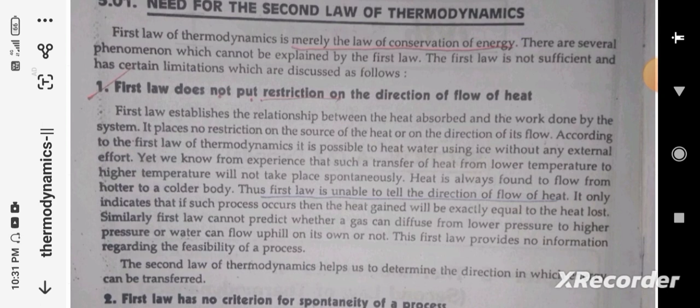Similarly, the first law cannot predict whether a gas can diffuse from lower pressure to higher pressure, or whether water can flow uphill on its own or not. The first law provides no information regarding the feasibility of a process.

The second law of thermodynamics helps us determine the direction in which energy can be transferred. The first law has no criterion for the spontaneity of a process.

There are several natural processes which take place of their own in one direction only, but do not proceed in the reverse direction on their own. For example, water flows down a hill but cannot flow up the hill on its own. Flow of heat from warmer to colder body, expansion of gas into a vacuum, burning of fuels, etc. are some examples of processes which take place only in a particular direction. Such processes are called spontaneous processes.

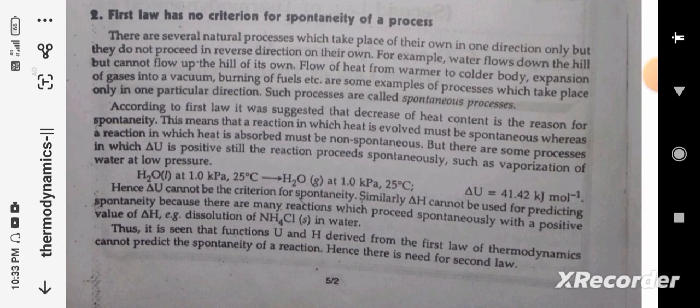Similarly, del H cannot be used for predicting spontaneity, because there are many reactions which proceed spontaneously with a positive value of del H. For example, dissolution of ammonium chloride in water. Thus, it is seen that the functions U and H derived from the first law of thermodynamics cannot predict the spontaneity of reactions. Hence, there is a need for the second law.

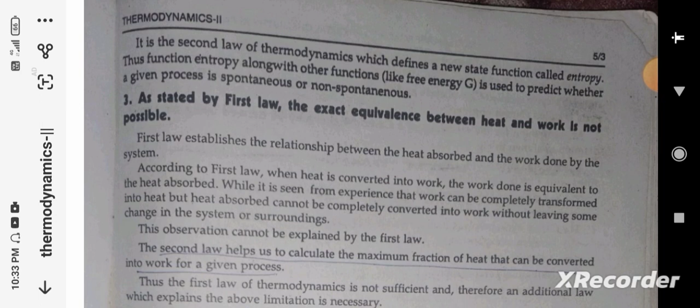It is the second law of thermodynamics which defines a new state function called entropy. This entropy function, along with other functions like free energy G, is used to predict whether a given process is spontaneous or non-spontaneous. As stated by the first law, the exact equivalence between heat and work is not possible.

The first law establishes the relationship between the heat absorbed and the work done by the system. According to the first law, when heat is converted into work, the work done is equivalent to the heat absorbed. While it is seen from experience that work can be completely transformed into heat, heat absorbed cannot be completely converted into work without leaving some change in the system or surroundings. These observations cannot be explained by the first law.

The second law helps us calculate the maximum fraction of heat that can be converted into work for a given process. Thus, the first law of thermodynamics is not sufficient, and therefore an additional law which explains the above limitation is necessary.

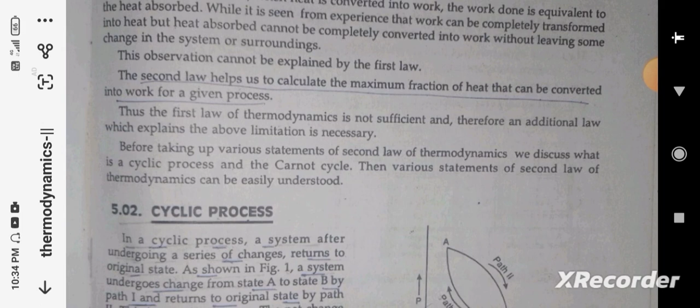Before taking up the various statements of the second law of thermodynamics, we discuss what is a cyclic process and the Carnot cycle, so that the various statements of the second law can be easily understood.

Cyclic process: in a cyclic process, a system, after undergoing a series of changes, returns to the original state, as shown in figure 1. A system undergoes change from state A to state B by path 1, and returns to the original state by path 2. This is a cyclic process.

The net change of internal energy in a cyclic process is zero, that is, del U is equal to 0. Therefore, according to the first law, del U is equal to Q plus W. For a cyclic process, since del U is 0, 0 is equal to Q plus W.

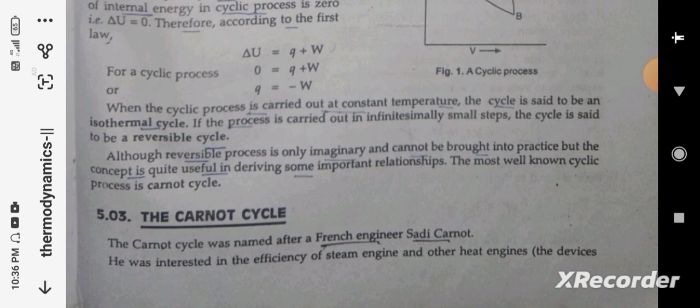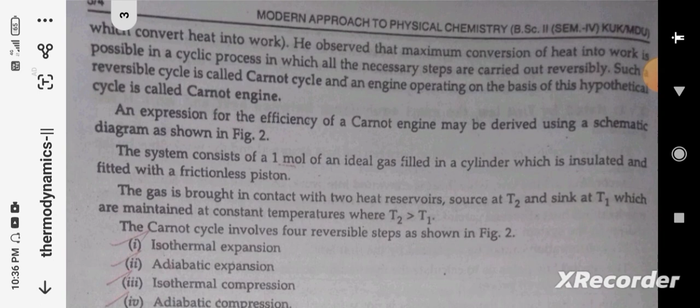The most well-known cyclic process is the Carnot cycle, named after French engineer Sadi Carnot. He was interested in the efficiency of steam engines and other heat engines, devices which convert heat into work. He observed that the maximum conversion of heat into work is possible in a cyclic process in which all the necessary steps are carried out reversibly. Such a reversible cycle is the Carnot cycle, and an engine operating on the basis of this hypothetical cycle is called a Carnot engine. An expression for the efficiency of a Carnot engine may be derived using a schematic diagram.

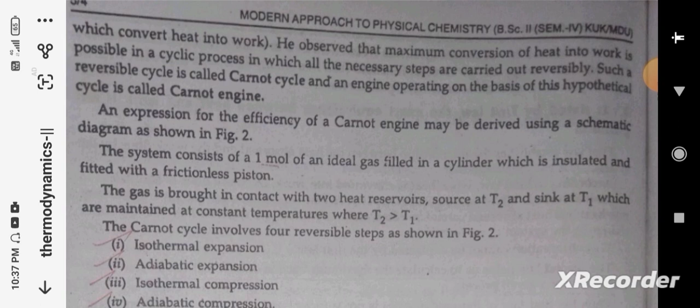The system consists of 1 mole of an ideal gas filled in a cylinder which is insulated and fitted with a frictionless piston. The gas is brought in contact with two heat reservoirs: a source at temperature T2 and a sink at T1, maintained at constant temperatures, where T2 is larger than T1. The Carnot cycle involves 4 reversible steps: isothermal expansion, adiabatic expansion, isothermal compression, and adiabatic compression.

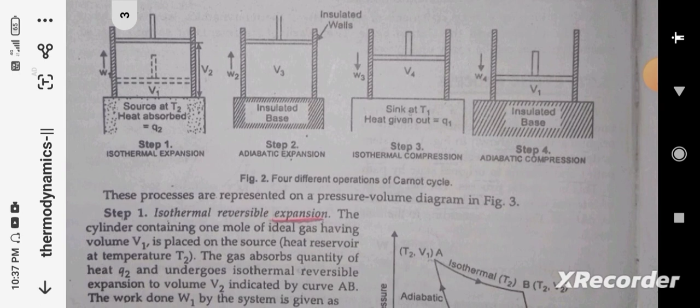The process is represented on the pressure-volume diagram. Step 1: isothermal reversible expansion. The cylinder containing 1 mole of ideal gas having volume V1 is placed on the source.

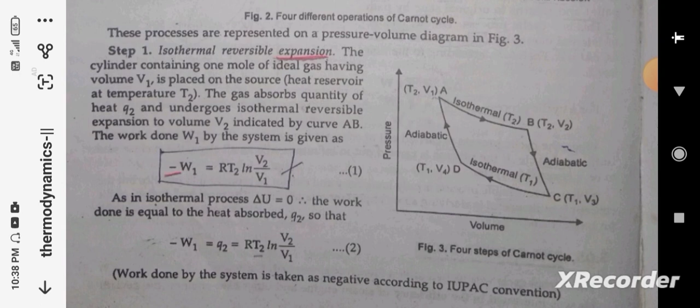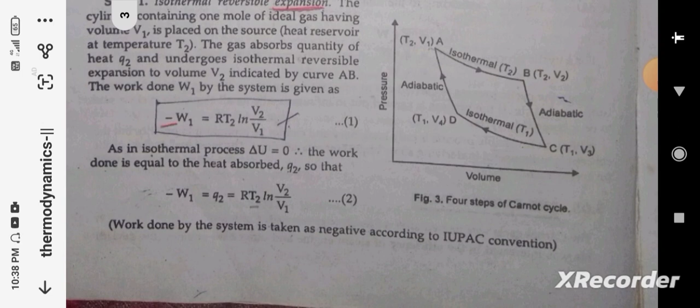The gas absorbs a quantity of heat Q2 and undergoes isothermal reversible expansion to volume V2, indicated by the curve AB. The work done W1 by the system is given by negative W1 equals RT2 ln(V2/V1). Since in an isothermal process del U equals 0, the work done is equal to the heat absorbed Q2, so that negative W1 equals Q2 equals RT2 ln(V2/V1). Work done by the system is taken as negative according to the IUPAC convention.

Step 2: adiabatic expansion. The cylinder is removed from the source and kept on an insulating base. The gas is allowed to expand adiabatically from volume V2 to V3. In this step, the temperature decreases to T1. This path is shown by the curve BC. The heat absorbed by the system is 0, as expansion takes place under adiabatic conditions. The work done W2 is given by the equation involving Cv, the heat capacity of the ideal gas. Work done is negative by the usual convention.

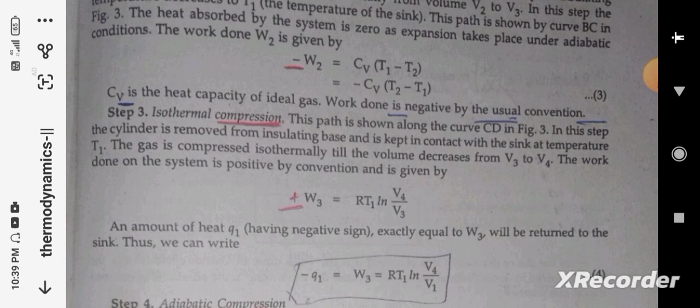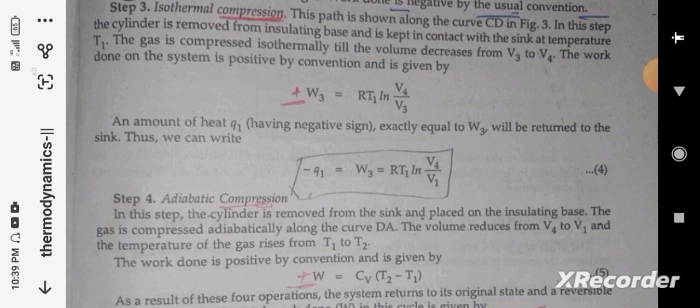Isothermal compression: this path is shown along the curve CD. In this step, the cylinder is removed from the insulating base and is kept in contact with the sink at temperature T1. The gas is compressed isothermally till the volume decreases from V3 to V4. The work done on the system is positive by convention and is given by W3 equals RT1 ln(V4/V3). An amount of heat Q1, exactly equal to W3, will be returned to the sink. Thus we can write the fourth equation.

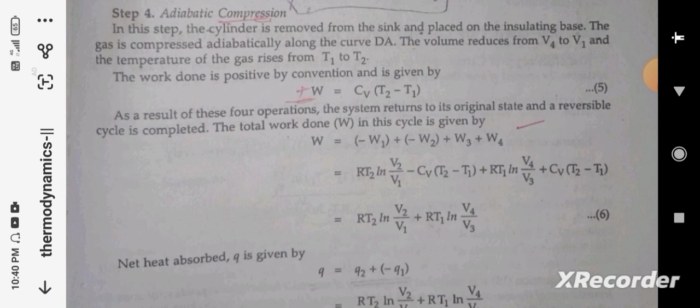Adiabatic compression: in this step, the cylinder is removed from the sink and placed on the insulating base. The gas is compressed adiabatically along the curve DA. The volume reduces from V4 to V1 and the temperature of the gas rises from T1 to T2. The work done is positive by convention and given by equation 5. As a result of these four operations, the system returns to its original state and the reversible cycle is completed. The total work done W in the cycle is given by equation 6, and the net heat absorbed Q is given by this equation.

Since the points T2,V2 and T1,V3 lie on the same adiabatic curve BC, and T2,V1 and T1,V4 lie on the adiabatic curve AD, using the expression TV^(gamma-1) equals constant and comparing equations 7 and 8, we get V4/V3 equals V1/V2.

Substituting these equations, we get the value of W, equation 11. From the above derivations, it is observed that the work done in the Carnot cycle is only the work involved in the isothermal operations, because the work done in the adiabatic operations cancels one another.

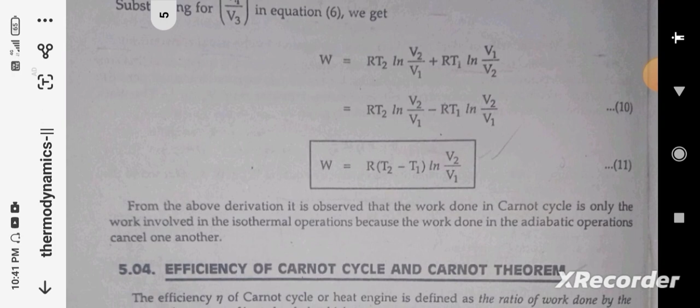Efficiency of the Carnot cycle and the Carnot theorem: the efficiency eta of the Carnot cycle or the heat engine is defined as the ratio of the work done by the system to the amount of heat absorbed at the higher temperature.

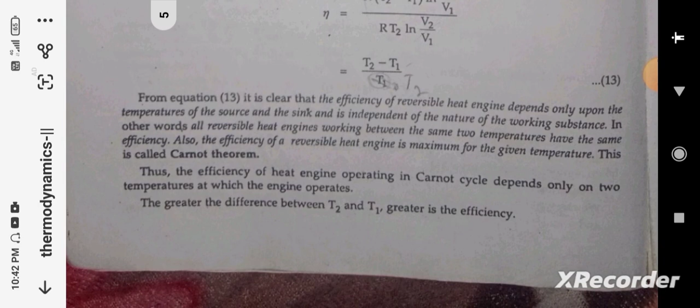Thus, eta is equal to W divided by Q2. Substituting the value of W and Q2 from equations 11 and 12 respectively, eta value is T2 minus T1 divided by T2. This is equation 13.

From equation 13, it is clear that the efficiency of the reversible heat engine depends only upon the temperature of the source and the sink, and is independent of the nature of the working substance. In other words, all reversible heat engines working between the same two temperatures have the same efficiency. Also, the efficiency of a reversible heat engine is maximum for the given temperature. This is called the Carnot theorem.

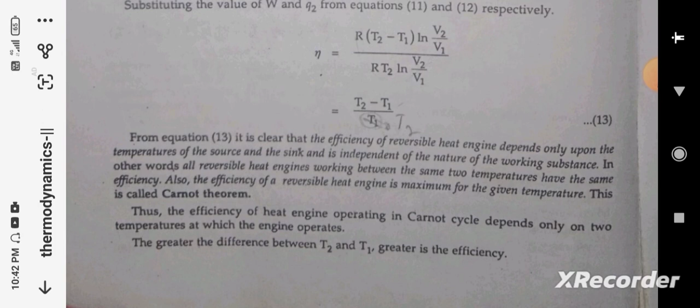Thus, the efficiency of a heat engine operating in the Carnot cycle depends only on the two temperatures at which the engine operates. The greater the difference between T2 and T1, the greater is the efficiency.

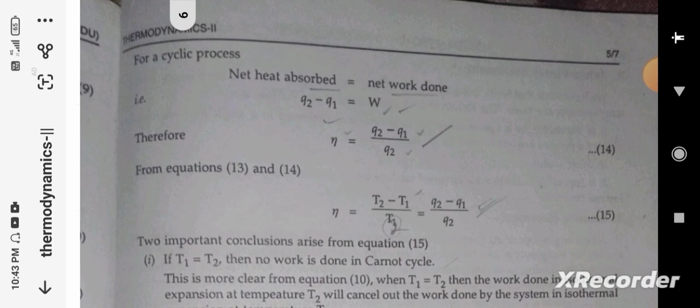For a cyclic process, net heat absorbed is equal to net work done. So Q2 minus Q1 is equal to W. Here eta is equal to Q2 minus Q1 divided by Q2.

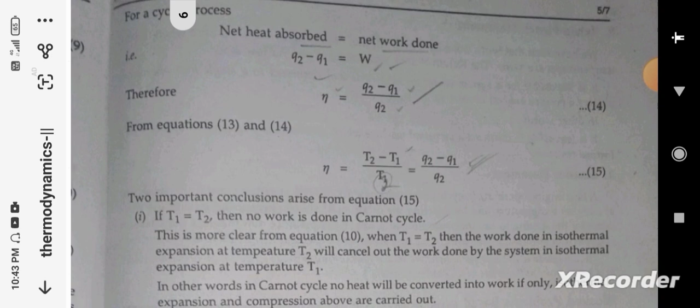Two important conclusions arise from equation 15. If T1 is equal to T2, then no work is done in the Carnot cycle. This is more clear from equation 10. When T1 is equal to T2, the work done is in isothermal expansion.

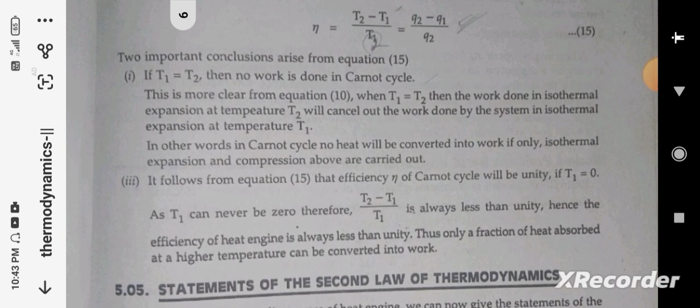At temperature T2 will cancel out the work done by the system in isothermal expansion at temperature T1. In other words, in the Carnot cycle, no heat will be converted into work if only isothermal expansion and compression are carried out. It follows from equation 15 that the efficiency eta of the Carnot cycle will be unity.

If T1 is equal to 0, and as T1 can never be 0, therefore T2 minus T1 divided by T2 is always less than unity. Hence, the efficiency of a heat engine is always less than unity. Thus, only a fraction of the heat absorbed at higher temperature can be converted into work.

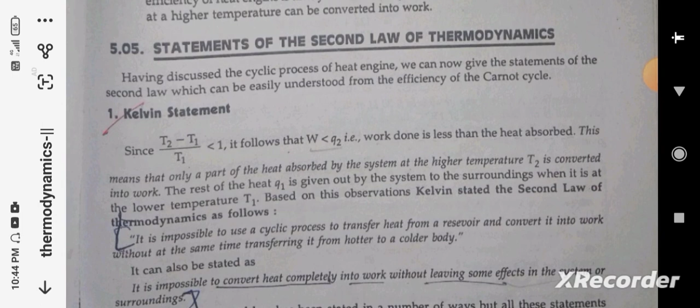Statement of the second law of thermodynamics. Having discussed the cyclic process of the heat engine, we can now give the statement of this second law, which can be easily understood from the efficiency of a Carnot cycle. Kelvin statement: since T2 minus T1 divided by T2 is less than 1, it shows that W

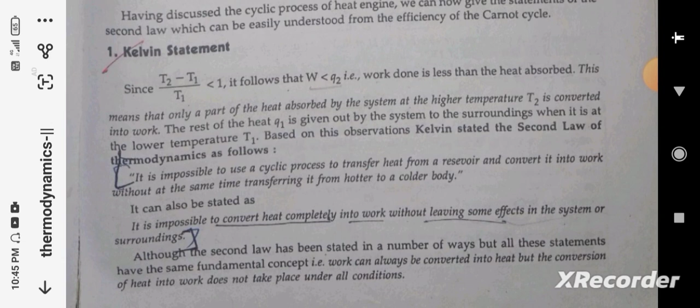is less than Q2, that is, the work done is less than the heat absorbed. This means that only a part of the heat absorbed by the system at the higher temperature T2 is converted into work. The rest of the heat Q1 is given out by the system to the surroundings

when it is at lower temperature T1. Based on these observations, Kelvin stated the second law of thermodynamics as follows: it is impossible to use a cyclic process to transfer heat from a reservoir and convert it into work without at the same time transferring it from hotter to colder body.

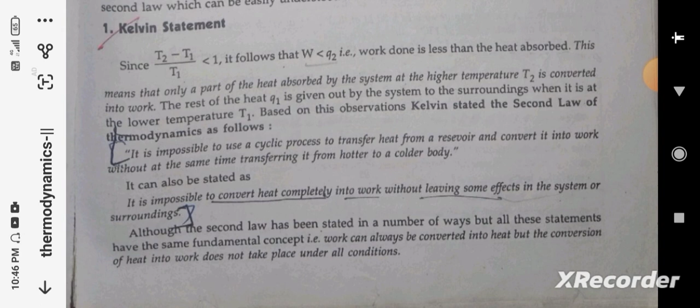It can also be stated as: it is impossible to convert heat completely into work without leaving some effects in the systems or surroundings. Although the second law has been stated in a number of ways, all these statements have the same fundamental concept, that is, work can always be converted into heat, but the conversion of heat into work does not take place under all conditions.

Kelvin and Planck's statement: we have seen that the work done by a heat engine operating in a cycle is zero when the two temperatures are same. The Kelvin-Planck statement of the second law is: it is impossible for a system operating in a cycle and connected to

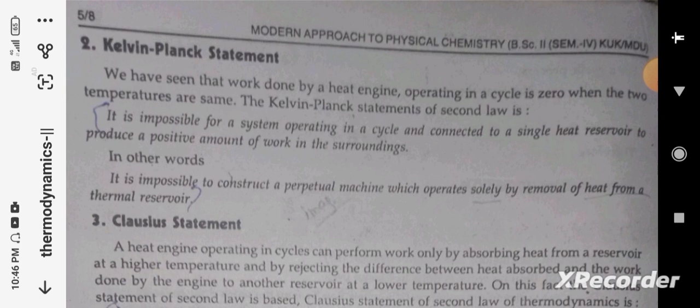a single heat reservoir to produce a positive amount of work in the surroundings. In other words, it is impossible to construct a perpetual machine which operates solely by removal of heat from a thermal reservoir. Clausius statement:

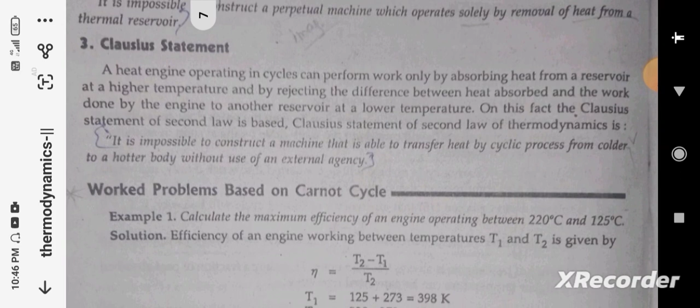A heat engine operating in a cycle can perform work only by absorbing heat from a reservoir at a higher temperature and by rejecting the difference between the heat absorbed and the work done by the engine to another reservoir at a low temperature. On this fact, the Clausius statement of the second law is based.

The Clausius statement of the second law of thermodynamics is: it is impossible to construct a machine that is able to transfer heat by a cyclic process from a colder to a hotter body without the use of any external agency.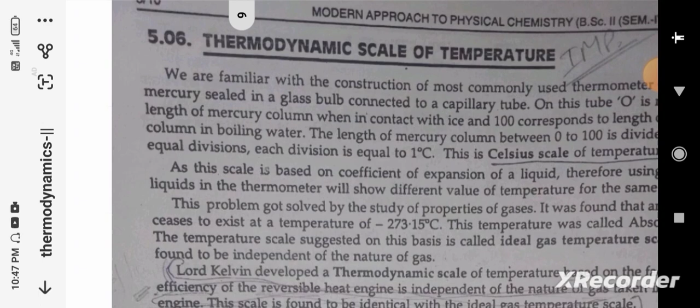Thermodynamic scale of temperature. We are familiar with the construction of the most commonly used thermometer, containing mercury sealed in a glass bulb connected to a capillary tube.

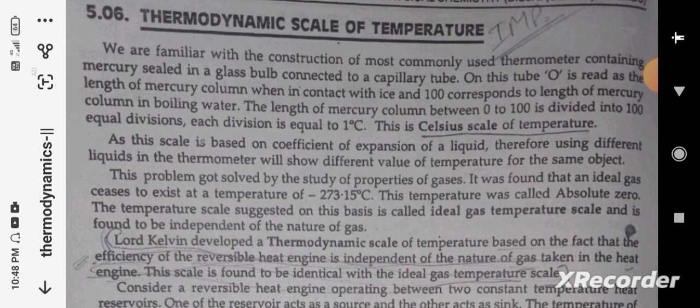On this tube, 0 is read as the length of the mercury column when in contact with ice, and 100 corresponds to the length of the mercury column in boiling water. The length of the mercury column between 0 and 100 is divided into 100 equal divisions, each division being equal to 1 degree Celsius. This is the Celsius scale of temperature.

As this scale is based on the coefficient of expansion of a liquid, using different liquids in the thermometer will show different values of temperature for the same object. This problem is solved by the study of the properties of gases.

It was found that an ideal gas ceases to exist at a temperature of minus 273.15 degrees Celsius. This temperature was called absolute zero temperature. The temperature scale suggested on this basis is called the ideal gas temperature scale, and is found to be independent of the nature of gases.

Lord Kelvin developed a thermodynamic scale of temperature based on the fact that the efficiency of the reversible heat engine is independent of the nature of the gas taken in the heat engine. This scale is found to be identical with the ideal gas temperature scale.

Consider a reversible heat engine operating between two constant temperature heat reservoirs. One of the reservoirs acts as a source and the other acts as a sink. The temperature of each reservoir on the new scale may be taken as proportional to the quantity of heat absorbed, Q2, from the source, or heat lost, Q1, to the sink.

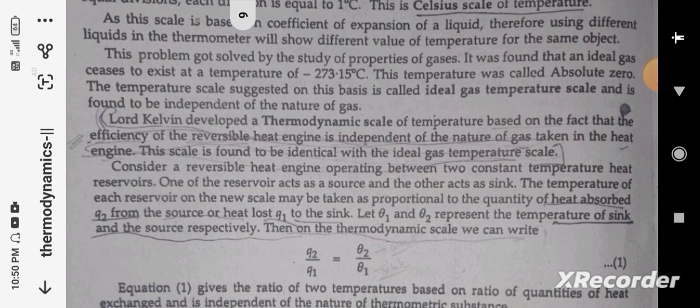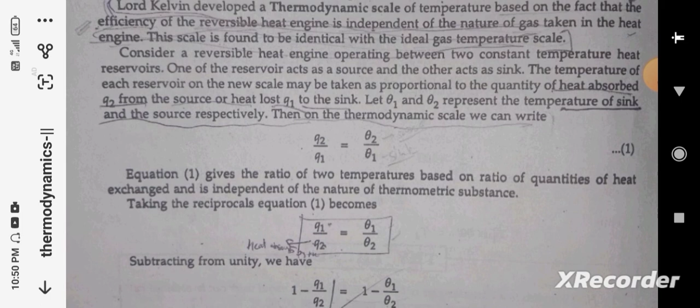Let theta 1 and theta 2 represent the temperatures of the sink and source respectively. Then, on the thermodynamic scale, we can write equation 1. This equation gives the ratio of two temperatures based on the quantities of heat exchanged, and is independent of the nature of the thermometric substance.

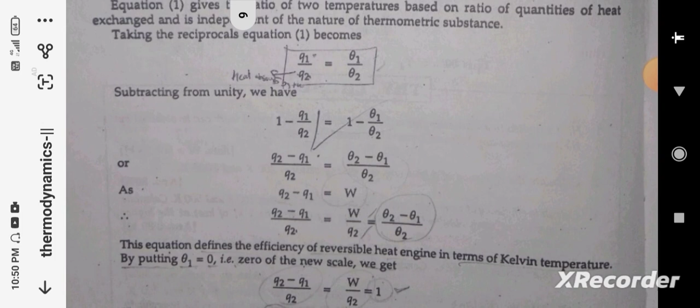Taking the reciprocal of equation 1, and subtracting from unity, we get W divided by Q2 is equal to theta 2 minus theta 1 divided by theta 2. This equation defines the efficiency of the reversible heat engine in terms of Kelvin temperature.

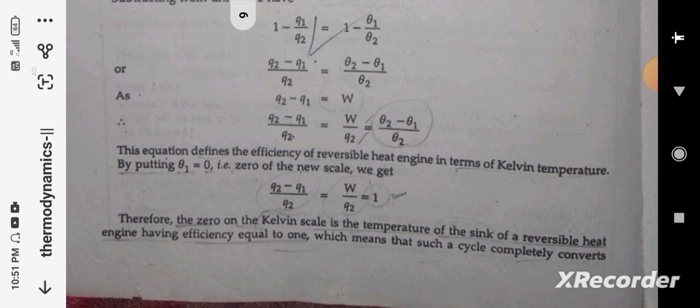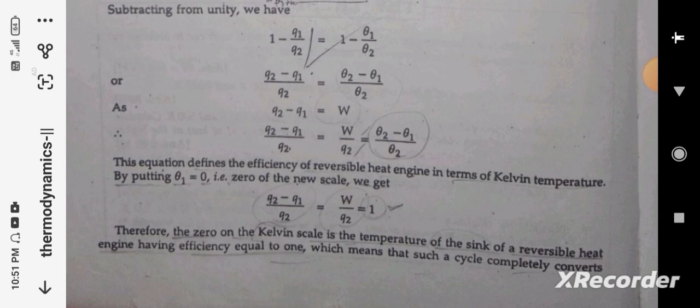Q2 minus Q1 divided by Q2 is equal to W divided by Q2, which is equal to unity. Therefore, the 0 on the Kelvin scale is the temperature of the sink of the reversible heat engine having an efficiency equal to 1, meaning such a cycle completely converts heat into work.

This is possible only if the lower temperature theta 1 is equal to absolute zero on the ideal gas temperature scale. In fact, the ideal gas scale and the Kelvin scale are identical, provided the gas is ideal. The temperature on the thermodynamic scale can be expressed in terms of degree Kelvin, represented as K.

Further, it has been found that if theta 1 is taken equal to 273.16 Kelvin, the triple point of water, then the Kelvin and Celsius scales become identical, that is, 273.16 Kelvin is equal to 0 degrees Celsius.

Entropy. The function entropy was established from the work of Carnot. Clausius, in 1850, introduced this function of state, S.

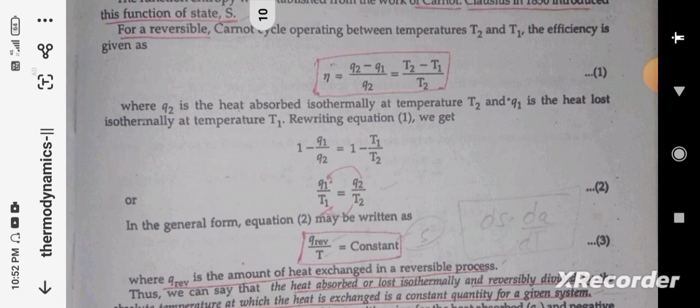For a reversible Carnot cycle operating between temperatures T2 and T1, the efficiency is given as eta equals Q2 minus Q1 divided by Q2, which is equal to T2 minus T1 divided by T2, equation 1, where Q2 is the heat absorbed isothermally at temperature T2, and Q1 is the heat lost isothermally at temperature T1.

Rewriting equation 1, we get equation 2. In general form, equation 2 may be written as Q reversible divided by T is equal to a constant, where Q reversible is the amount of heat exchanged in a reversible process. Thus, we can say that the heat absorbed or lost isothermally and reversibly, divided by the absolute temperature at which the heat is exchanged, is a constant quantity for a given system.

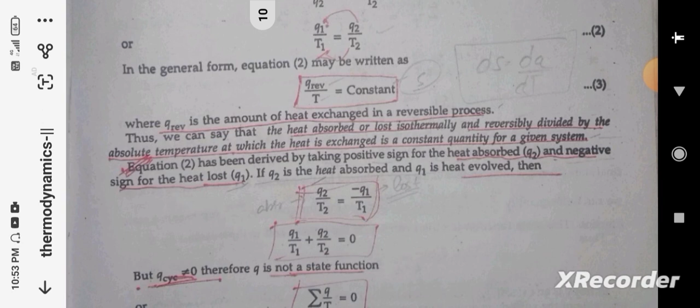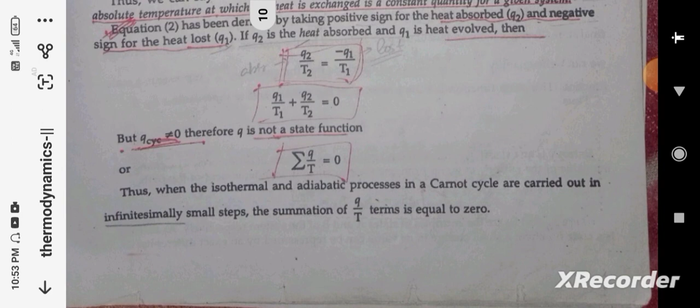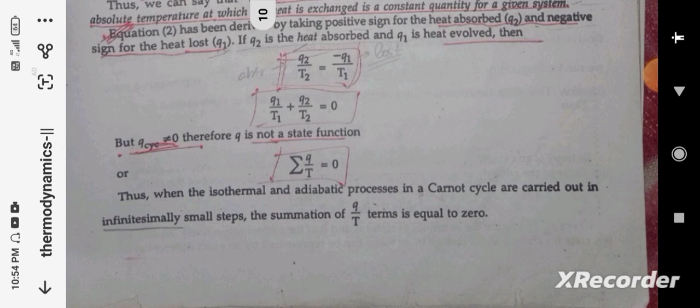Equation 2 has been derived by taking the positive sign for the heat absorbed, Q2, and the negative sign for the heat lost, Q1. If Q2 is heat absorbed and Q1 is heat evolved, then we can write these equations. Therefore, since Q is not a state function, the summation of Q divided by T is equal to 0, or when the isothermal and adiabatic processes in a Carnot cycle are carried out in infinitesimally small steps, the summation of the Q divided by T terms is equal to 0.

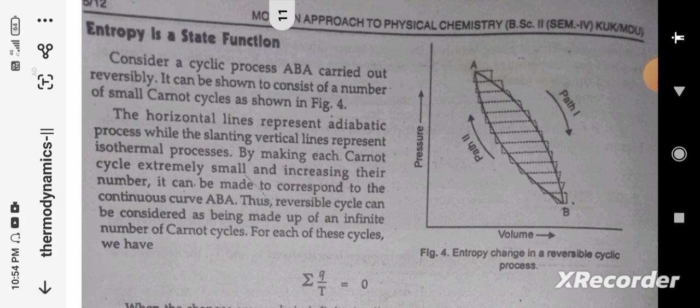Entropy is a state function. Consider a cyclic process ABA carried out reversibly. It can be shown to consist of a number of small Carnot cycles as shown in figure 4.

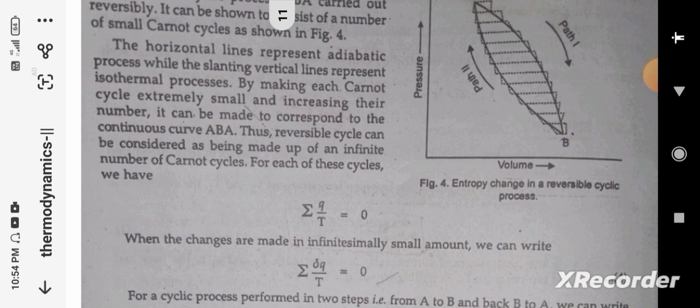The horizontal lines represent the adiabatic process, while the slanting vertical lines represent the isothermal process. By making each Carnot cycle extremely small and increasing their number, it can be made to correspond to the continuous curve ABA. Thus, a reversible cycle can be considered as being made up of an infinite number of Carnot cycles.

For each cycle, we have summation of q divided by t equal to 0 when the changes are made in infinitesimally small amounts. We can write the equation for a cyclic process performed in two steps, that is from A to B and back B to A. We can write equation number 5.

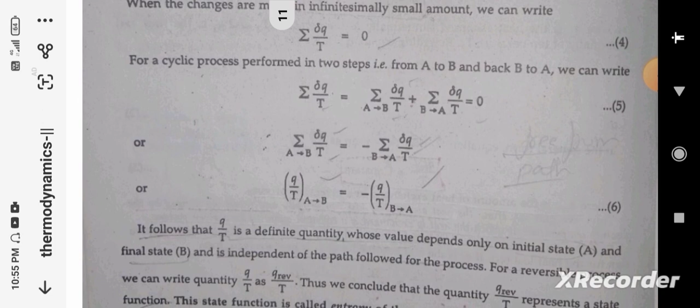It follows that q divided by t is a definite quantity whose value depends only on the initial state A and the final state B, and is independent of the path followed for the process.

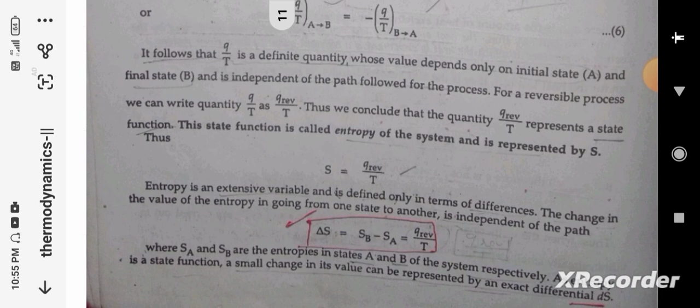For a reversible process, we can write the quantity q divided by t as q reversible divided by t. Thus, we conclude that q reversible divided by t represents a state function. This state function is called entropy of a system and is represented by S. Thus, S is equal to q reversible divided by t.

Entropy is an extensive variable and is defined only in terms of differences. The change in the value of entropy going from one state to another is independent of the path. Del S is equal to q reversible divided by t, where SA and SB are the entropy in states A and B of the system respectively.

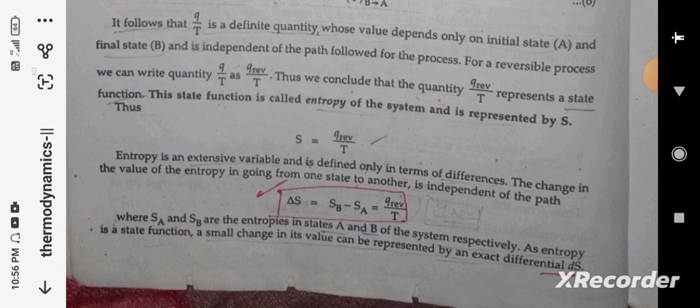As entropy is a state function, a small change in its value can be represented by an exact differential, dS. Hence we can write dS is equal to q reversible divided by t.

Unit of entropy. Entropy change is expressed as del S equal to q reversible divided by t. Entropy is expressed in terms of joules per degree Kelvin. When heat is expressed in calories, then entropy is reported as calories per degree. Further, entropy is an extensive property.

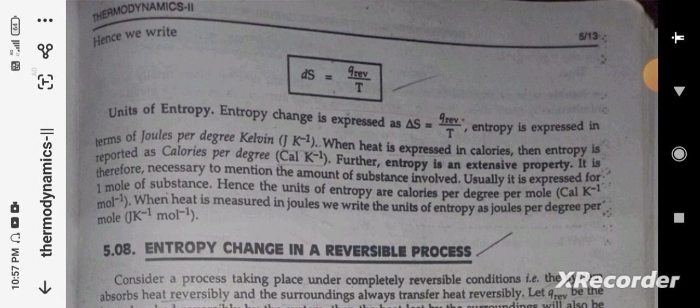It is therefore necessary to mention the amount of substance involved. Usually it is expressed for 1 mole of substance. Hence the units of entropy are calories per degree per mole. When heat is measured in joules, we can write the unit of entropy as joule per degree per mole.

Entropy change in the reversible process. Consider a process taking place under completely reversible conditions, that is, the system absorbs heat reversibly and the surroundings always transfer heat reversibly. Let q reversible be the heat absorbed reversibly by the system, then the heat lost by the surroundings will also be q reversible.

If the heat transfer takes place isothermally at the absolute temperature T1, then the entropy change in the reversible process will be the negative of the entropy change of the surroundings. That is, del S of the system is negative del S of the surroundings.

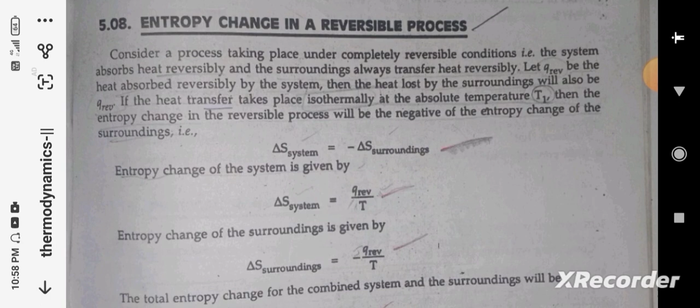Entropy change of the system is given by del S of system equal to q reversible divided by t. Entropy change of the surroundings is given by del S of surroundings equal to negative of q reversible divided by t. The total entropy change of the combined system and surroundings will be equal to 0.

Thus, the following conclusions can be drawn from the above discussion. Number 1: the total del S for the system and surroundings when a reversible isothermal change occurs in it is 0. The total entropy change for a reversible isothermal cycle is 0.

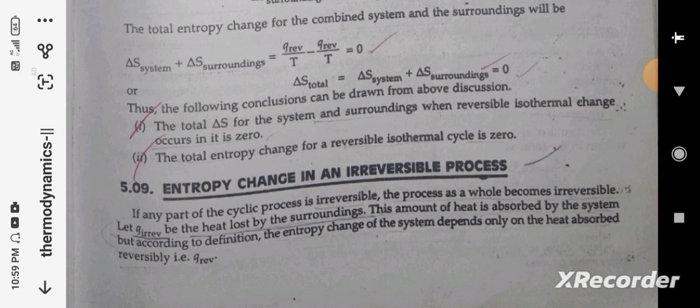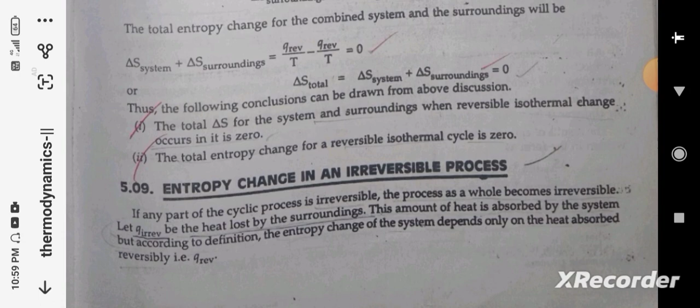Entropy change in an irreversible process. If any part of a cyclic process is irreversible, the process as a whole becomes irreversible. Let Q irreversible be the heat lost by the surroundings. This amount of heat is absorbed by the system, but according to the definition, the entropy change of the system depends only on the heat absorbed reversibly, that is Q reversible.

Thus, del S of system is equal to Q reversible divided by T. Further, assume that the surroundings lose Q irreversible amount of heat isothermally in infinitesimally small steps, then the entropy change of the surroundings will be del S of surroundings equal to negative of Q irreversible divided by T. The net change in the entropy of the system and surroundings combined is given by equation 1.

Further, we know that the work done in a reversible process is maximum. That is, the first law for a reversible process can be written as del U equal to Q reversible minus W reversible. When the process is carried out irreversibly, we can write equation number 3.

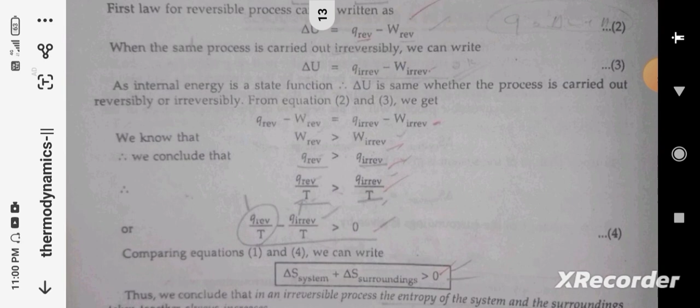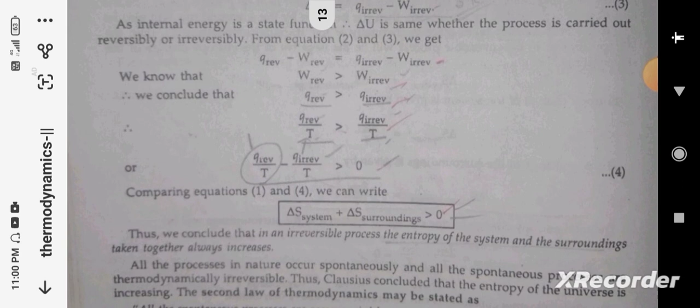As the internal energy is a state function, del U is the same whether the process is carried out reversibly or irreversibly. From equations 2 and 3, we get equation number 4. Comparing equations 1 and 4, we can write del S of system plus del S of surroundings is greater than 0.

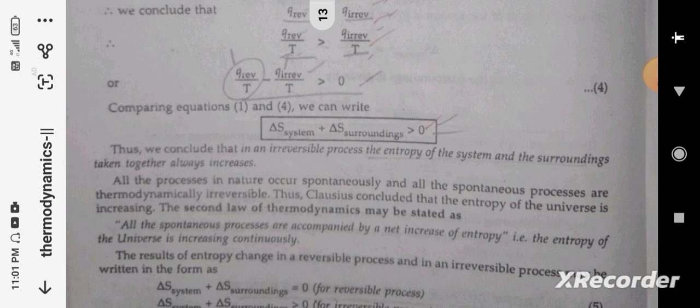Thus, we conclude that in an irreversible process, the entropy of a system and the surroundings taken together always increases. All processes in nature occur spontaneously, and all spontaneous processes are thermodynamically irreversible. Thus, Clausius concludes that the entropy of the universe is increasing. The second law of thermodynamics may be stated as: all spontaneous processes are accompanied by a net increase of entropy, that is, the entropy of the universe is increasing continuously.

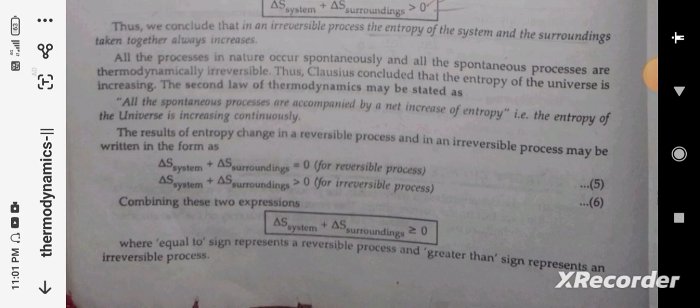The result of the entropy change in a reversible process and in an irreversible process may be written in the form of equations 5 and 6. Combining these two expressions, del S of system plus del S of surroundings is greater than or equal to 0, where the equal sign represents a reversible process and the greater than sign represents an irreversible process.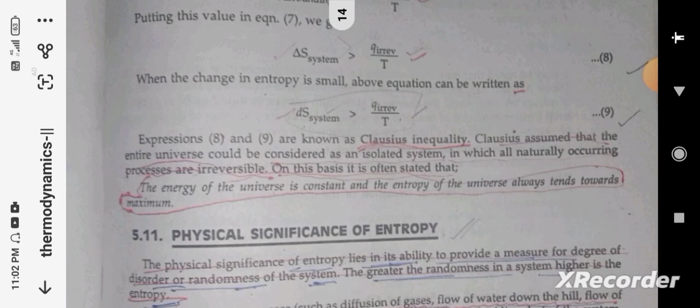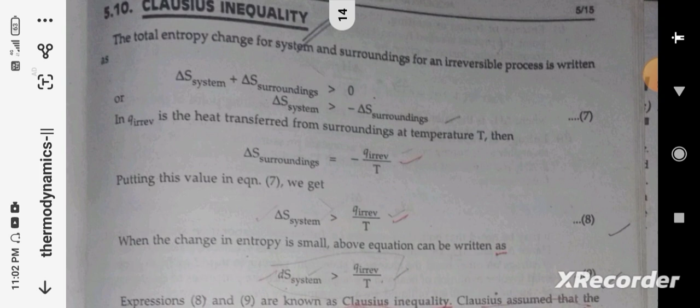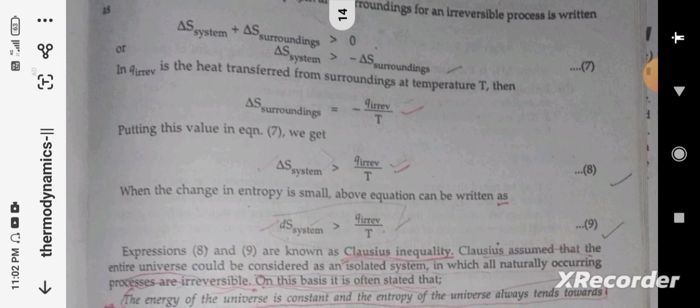Clausius inequality: the total entropy change for the system and surroundings for an irreversible process is written as del S of system plus del S of surroundings is greater than 0. In equation number 7, Q irreversible is the heat transferred from the surroundings at temperature T. Then we get from equation 7 to equation 8 when the change in entropy is small. The above equation can be written as equation number 9. Expressions 8 and 9 are known as Clausius inequality.

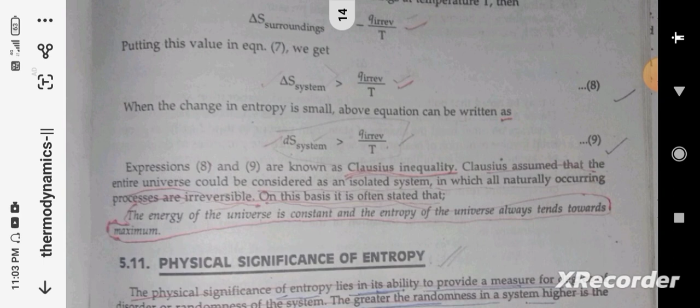Clausius inequality assumes that the entire universe could be considered as an isolated system in which all naturally occurring processes are irreversible. On this basis, it is often stated that the energy of the universe is constant and the entropy of the universe always tends towards maximum.

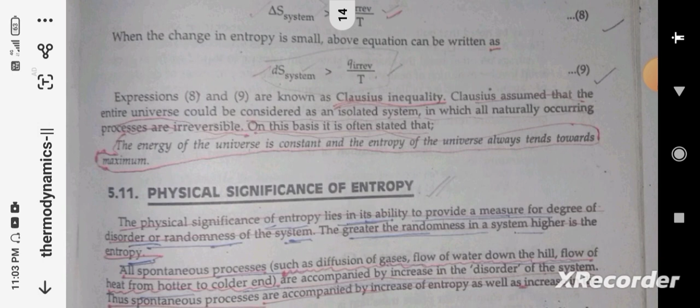Physical significance of entropy. The physical significance of entropy lies in its ability to provide a measure of the degree of disorder or randomness of a system. The greater the randomness in a system, the higher the entropy.

All spontaneous processes, such as diffusion of gases, flow of water down the hill, flow of heat from hotter to colder, are accompanied by an increase in the disorder of the system. The spontaneous processes are accompanied by an increase of entropy as well as an increase in the disorder of the system.

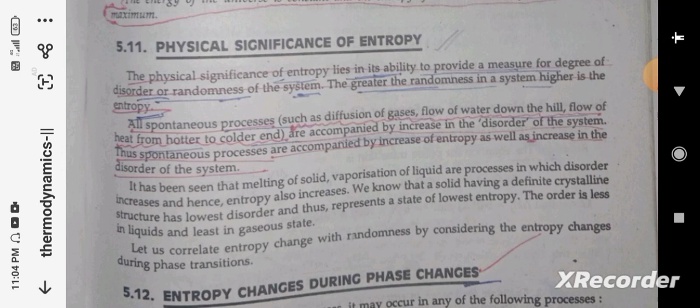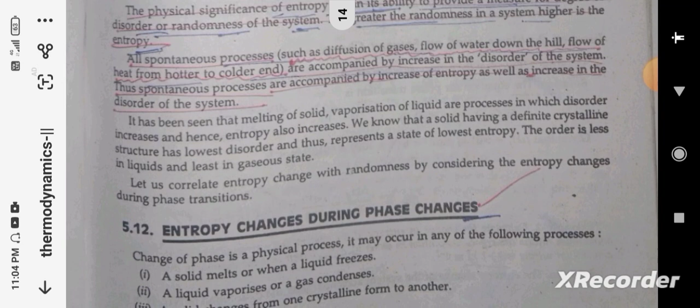It has been seen that melting of solids and vaporization of liquids are processes in which the disorder increases, and hence entropy also increases. We know that a solid having a definite crystalline structure has the lowest disorder and thus represents a state of lowest entropy. The order is less in liquids and least in the gaseous state.

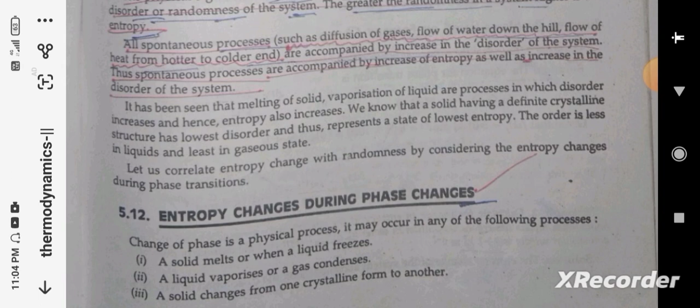Let us correlate entropy changes with randomness by considering the entropy changes during phase transitions. Entropy change during phase transitions, change in physical process: it may occur in the following processes: a solid melts, or a liquid freezes, a liquid vaporizes, or a gas condenses, or a solid changes from one crystalline form to another.

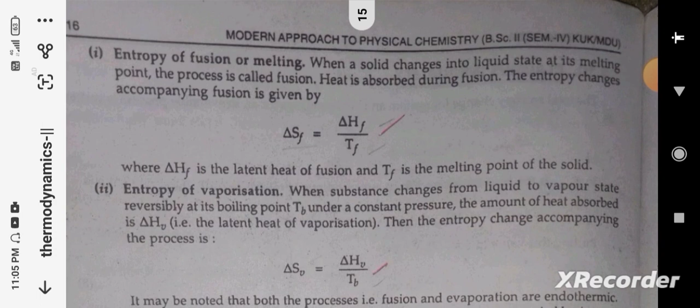Entropy of fusion or melting. When a solid changes into the liquid state at its melting point, the process is called fusion. Heat is absorbed during fusion. The entropy change accompanying fusion is given by del S(F) equals del H divided by Tf, where del Hf is the latent heat of fusion and Tf is the melting point of the solid.

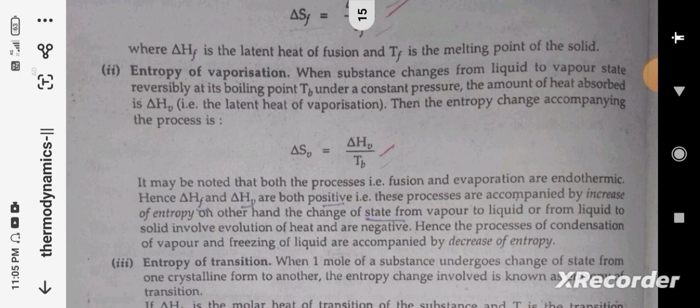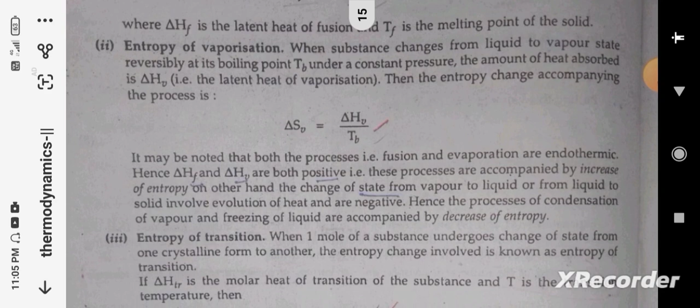Entropy of vaporization. When a substance changes from liquid to vapor state reversibly at its boiling point Tb under constant pressure, the amount of heat absorbed is del Hv. Then the entropy change accompanying the process is del Sv equals del Hv divided by Tb.

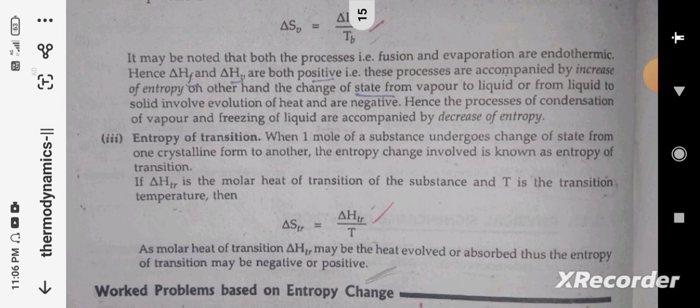It may be noted that both processes, fusion and vaporization, are endothermic. Hence del Hf and del Hv are both positive, meaning these processes are accompanied by an increase in entropy. On the other hand, the change of state from vapor to liquid or from liquid to solid involves evolution of heat and is negative. Hence, the processes of condensation and freezing of liquids are accompanied by a decrease in entropy.

Entropy of transitions. When one mole of a substance undergoes a change of state from one crystalline form to another, the entropy change involved is known as the entropy of transition. If del H(Tr) is the molar heat of transition of the substance and T is the transition temperature, then del S(Tr) equals the heat of transition divided by T. As the molar heat of transition, del H(Tr), may be evolved or absorbed, the entropy of transition may be negative.